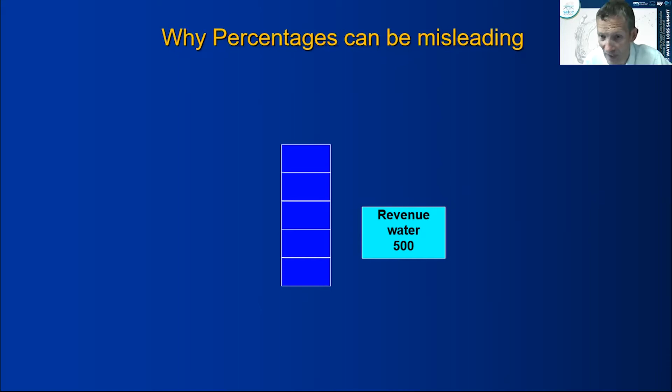We managed to get the consumption, the revenue water, reduced from 800 to 500, because all our teams are working flat out to reduce the consumption. Your losses remain basically the same in this particular case - it's a very rough calculation, but we're assuming pressure management hasn't played a big part in this. So we're keeping the losses, the burst pipes and the meter errors - let's just assume that number stays the same. Your total is now 700, because your non-revenue water has not gone down, since you've driven the demand down.

When you're in a crisis, driving the demand down is the only real thing you can do very quickly. It's very difficult to implement pressure management during an emergency situation, because you need to have the pressure reducing valves in the ground, and it takes you 6 months to a year to put in a pressure reducing installation. Your non-revenue water jumps up to almost 30%.

Because you've been successful, because you've actually driven the demand down, your non-revenue water has increased. It's almost doubled. That is why percentages can be misleading in cases where consumption changes significantly. That is why the IWA often recommend that you don't use percentages and that you use some other indicator. Unfortunately, everybody still uses percentages and they'll be used for the next 100 years. Everyone understands percentages. It is critical that you understand when they can be misleading. Those two slides show you exactly what that means.

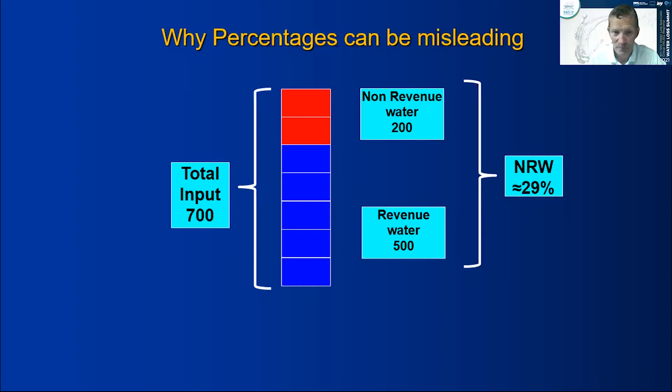I've noticed while we've been during the interval that SAICE has been promoting engineering as a career, with all their adverts about careers, people with screwdrivers and hammers and stuff like that. So I thought I'd just show you a little video clip here. I don't know if any of you know Dilbert - this is a Dilbert clip. If you can keep quiet and turn your volume up so you can hear this. It's not a long video clip. I'm going to play it now.

I'm worried about little Dilbert. He's not like other kids. What do you mean? Yesterday I left him alone for a minute and he disassembled the TV, our clock, and the stereo. That's perfectly normal, kids take things apart. The part that worries me is he used the components to build a ham radio set. Oh dear. Is that bad? Normally I'd want to run an EEG on him, but the machine isn't working. It's worse than I feared. What is it? I'm afraid your son has the knack. The knack? The knack - it's a rare condition characterized by an extreme intuition about all things mechanical and electrical, and utter social ineptitude. Can he lead a normal life? No. He'll be an engineer. No!

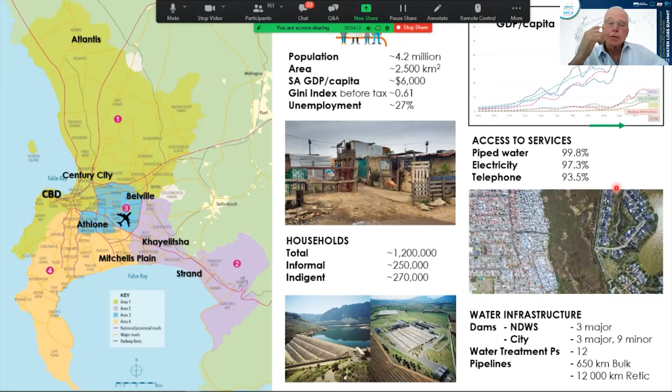It makes a big difference if you only have 10% of the spending power to react. So it was tricky having people make suggestions and then not being able to say thank you very much - that added an interesting aspect. Access to services in Cape Town is pretty good, but a large number of households are informal and indigent. This specifically impacts how water and sanitation services are delivered, because 40% of households do not pay for their services - they're essentially subsidized, which adds a layer of complication.

Ironically, the reason Cape Town was established in the first place was water. The seagoing merchants on their way to the east needed to secure a supply point. And the city's formal record of

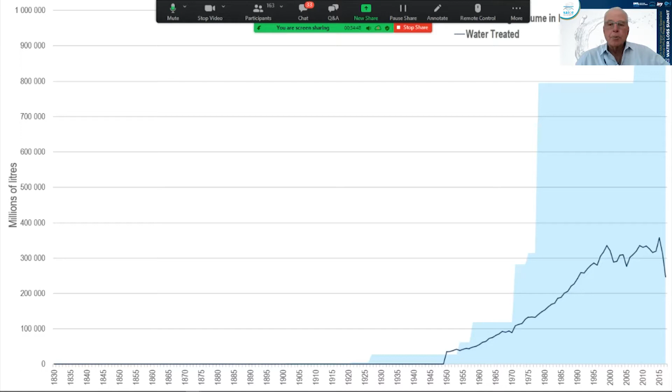water history dates back to some 1834. I've listed a few of the iconic features going forward through from that time. The first formal structures were built from about 1850, and some of those are still in use, where Cape Town has been storing surface water for use.

The graph shows the total accumulated storage in the blue shaded area, with the water treated per day, the annualized, on the dark blue line through the years.

So the first dams that were situated on top of Table Mountain really were very small by comparison with the scale of things today. Then Cape Town expanded further out to the Steenbras, to the mountains above Gordons Bay, and then built Wemmershoek.

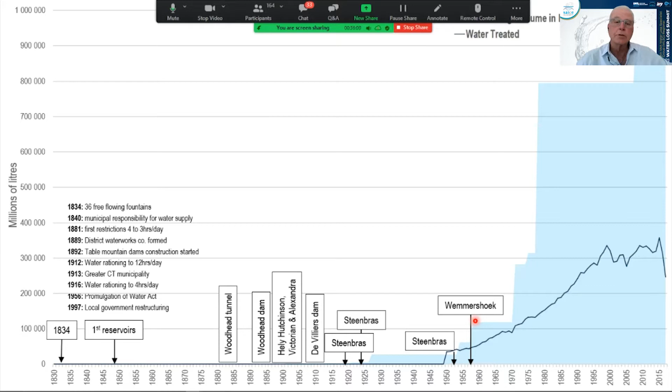It was during the time of the construction of Wemmershoek that the National Water Act changed and made it the responsibility of the National Department to license large dams, and they took it upon themselves to establish a construction unit and effectively constructed the dams thereafter, which were then the Voelvlei, the Theewaterskloof, which really doubled the capacity of the system at that time, and then the last one being the Berg River

Dam, which was filled for the first time in 2007.

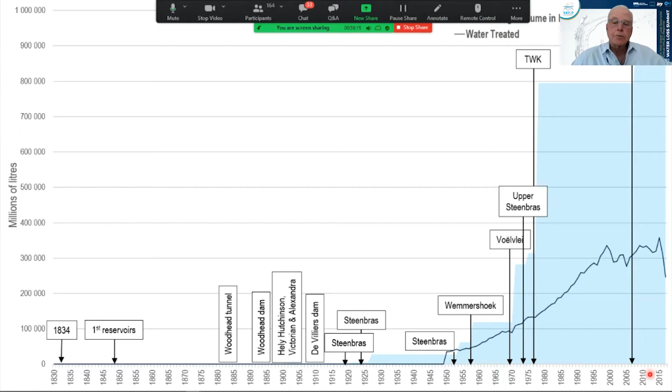Looking at the way the system works, it's important to note that Cape Town uses an integrated surface water system for its supply, known as the Western Cape Water Supply System.

This comprises 6 dams, and as I've mentioned, the last 3 that were constructed, the National Department owns and operates: the Voelvlei, Theewaterskloof, and the Berg River Dam. They comprise the bulk of the capacity.

The city owns and operates the 3 smaller ones, which are Steenbras Lower and Upper, and Wemmershoek, and they account for about 15% of the capacity of the system.

The system is integrated through means of tunnels, canals, and pipeline links, and the yield is maximized by operating the system in order to minimize spillage during the winter rainfall season.

The city manages this by changing the loading on the different dams through its water treatment plants, because it can feed into its own ring main, effectively, of bulk distribution pipeline.

So it's clearly important for there to be close collaboration between the city and the National Department in terms of operating and running the system. Now the majority of the water, as you see, comes from runoff.

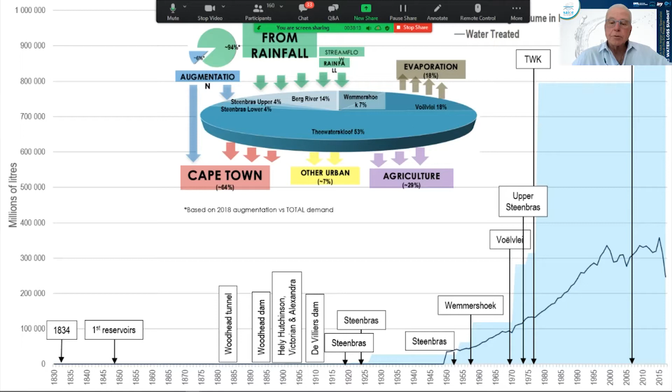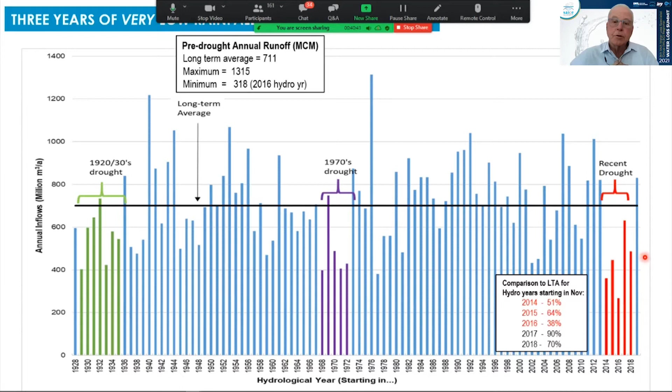But it's interesting to note that the very next year, we were down again with a fairly low level of about 70% of long-term average. We were concerned that might just have been a spike, and we were on a new low. But it would appear things are normalizing again, and certainly the dams are full right now, in fact over 100%.

To look at the fundamental mechanism of the drought, there was a persistent high-pressure cell that became resident out over the west coast of the southern African continent, and this would persist for the period of the drought. Normally, cold fronts would sweep across and cross over the mountainous areas which held our catchments and drop the rain. But with this high pressure cell, it was forcing these cold fronts to miss the continent. When we did get any coming, it would just be the tail ends, very low amounts of rain would fall. The majority would then just fall uselessly into the ocean.

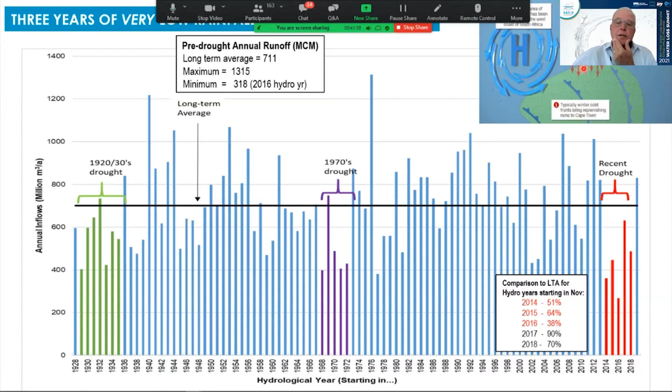So the scene was pretty much set, and we felt like we were operating pretty much in the perfect storm. The water levels in the dams were dropping rapidly. The media, there was a heightening awareness and concern. Social media was growing exponentially with negativity and fake news.

The politics was a bit of a mess, to say the least. The political environment was very tricky, both at an inter-tier level with the three tiers of government, because of different parties being in the central government and the leadership of the country. The provincial party was the DA, and so was Cape Town. But even within Cape Town, there were factions developing, and there was unhappiness there. So that really didn't make things easy for us as officials to manage within the political framework.

Revenue, of course, we needed to keep the business going, but revenue was dropping because sales were down as a result of restrictions. Although we had three levels of tariffs that we could impose at different restriction levels, once we went beyond those, we didn't have any more. So we couldn't balance - that became a challenge as well.

And of course, trust was getting down to an all-time low between the city and the public, and the city and the national department, etc. So we had to find our way through the storm.

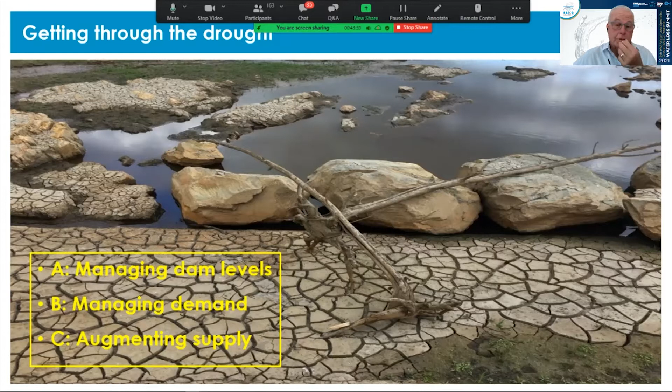So let me have a look at managing the dams. We've seen how the system yield is utilized, and I'll go into a bit more detail: agriculture uses 29%, and as I've said before, that's controlled by the National Department and how they allocate that. Other municipalities in the region, which get water directly and through the city, take about 7%. And the city uses 64%.

As you can see from the split, residential usage is the highest at 70%, with commerce and industry accounting for another 17%, and the balance going to government and other departmental uses.

So the focus was obviously on residential use to drive the demand down, and that's where we put a lot of our attention. Looking at the three graphs along the bottom: this was unrestricted outflows prior to the drought, this was then, during the drought, what was planned to be used in terms of having the different restriction levels, and in the peak of the drought, this is what actually happened. I'll go through them here.

The green is the evaporation portion, which, as I said, was about 18%. But as you can see, in the hot, dry summer, evaporation is high, and it tapers off during the wet, rainy winter periods.

Typically, you get a similar pattern with the urban demand, which is higher during summer and then drops. You can see this band is a bit narrower here during the winter time. Agriculture, on the other hand, in the purple band, takes the bulk of their water during the summer peak period.

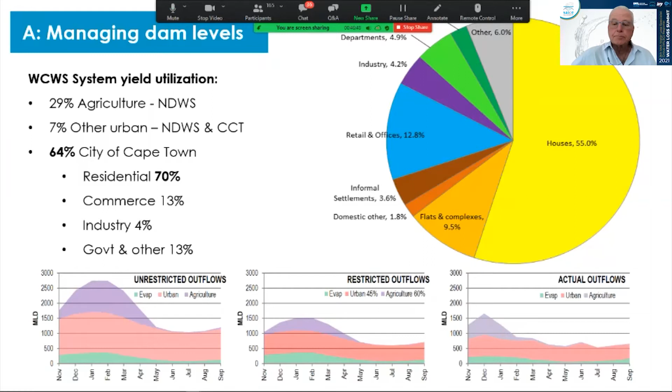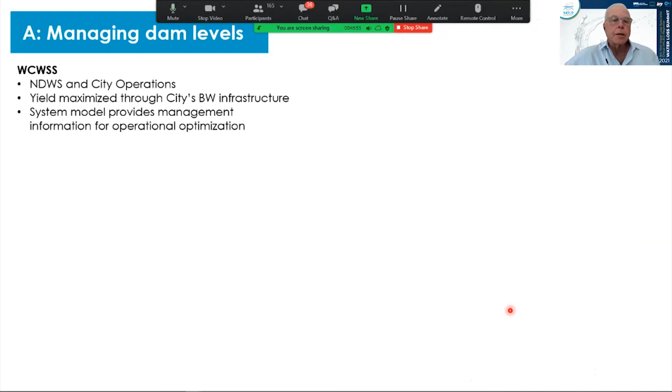So I've spoken about the way in which the national department and the city operations needed collaboration. The yield, I've spoken about how that's been maximized. But what I think I want to get to now is just to talk about how we thought we should best manage this from a public perception point of view.

We realized that we needed to try and get as much information out there as possible. But I must just say at this point that up until a certain point in the process, the mayor had decided that no information could go out of the city about the drought management other than through her or one of her mayoral committee members. This meant that myself, Dr. Kaiser, any of my managers were not entitled to talk to any form of the media and give them any information.

Now, this made it very difficult because the public, you can fool some of the people some of the time, as the old adage goes. But if you keep on trying to pull the wool over people's eyes, just remember that there are retired water engineers, working engineers out there that understand the system and understand how things work, and couldn't understand why certain things were being done. We were being driven in a certain direction through the political leadership, which didn't make sense to us, and we were finding it hard to deal with the public response.

Anyway, to get back to how we then addressed it eventually, we put out a daily dashboard to track performance.

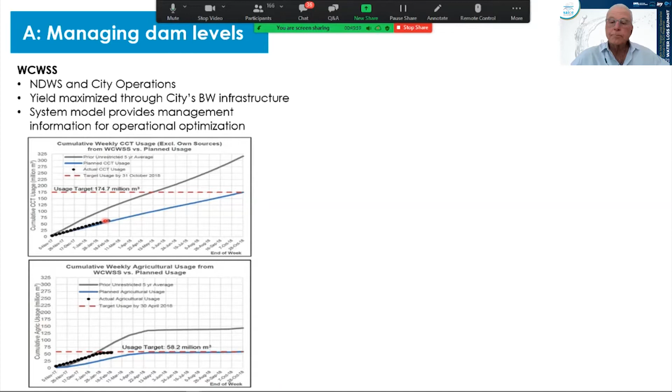The next important thing we did in terms of managing the dams was to monitor and track and effectively show the public how this was doing. This was the time when the Day Zero concept came to life. I need to explain Day Zero, because it was a concept born in the disaster management environment, but it really caught on in the media. We realized we weren't going to be able to kill that, so we needed to take it and use it, but define it in our own terms.

So we used the modeled system curves and superimposed the actual drawdown each week onto that. Let me give you some idea of what this means. You can see there's a line here that says 13.5% - this is the dam capacity of the system, and this is time along the bottom. This is the modeled performance of the dams based on sort of average through the year, and this is the plotted decline of the dam in that particular cycle. This is the 10% level.

Now, beyond that, abstracting water below that is very tricky. We realized we could probably still get water out of the system down to about 8, possibly 7%, with some effort, but typically down to 10% with ease.

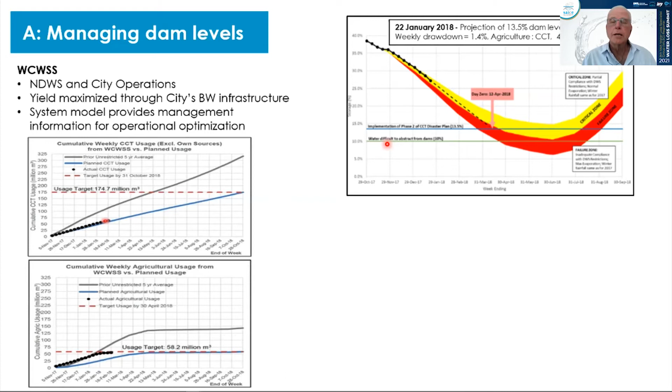So in terms of the Day Zero definition, we said that although in the public eye Day Zero was deemed to be the day Cape Town ran dry, we're saying no, it's the day we will resort to extreme restriction measures if we have to. If we reach that day and the dams are not lifting, we would then shut down the reticulation into the residential areas, and we would set up collection points for residents to collect water from. These were scattered around, and we'd worked out exactly where they could go and how they could be supplied. We would maintain normal supply to key points - hospitals and other key installations - and to commercial areas that needed to keep going in terms of not damaging the economy any more than we needed to.

So how much water would we need to take us through to when we believed we would be in the midst of the winter rainfall season? We gave ourselves a 3-month period from that point of Day Zero. So we worked out that we would need to keep an additional 3.5% in the dams above the 10%. So that 13.5% line was the critical point.

So in projecting the performance curve of how we were going, we would look back up the previous week, what was the angle of the curve, and extrapolate that down. Where it intersected this 13.5% line was effectively the point in time when we considered that to be Day Zero - when we would go to extreme restriction level. So it was a lot more conservative than people would imagine. But this is quite a tricky concept for the layperson to understand, so generally it was just said: Day Zero, Cape Town goes without water.

On that day, on the 22nd of January 2018, a press conference was held, and Patricia de Lille decided at that point she would put this out to the public. So it was announced that we would reach Day Zero on the 12th of April, and that was the date indicated here. That went around the world faster than I don't know what - before you knew it, Cape Town was going to be the first major city to run out of water. So that had quite significant impacts, and it didn't exactly help our stress level.

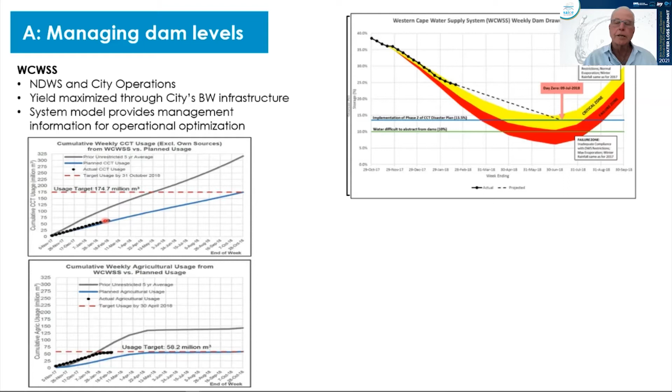And then the third thing was a breakthrough in terms of the response from the public, from the consumers in the residential areas and in industry, to really take on a citizenry approach and work together to try and drive down demand. We broke through a 600, 650 barrier that we'd had and started to get down closer to the 500 megaliter a day.

So with the combination of those three things, that curve flattened out. In the subsequent weeks, this curve flattened considerably, and day zero became a non-issue because it was being projected out to infinity. So for that year, day zero was not a problem. We realized it could occur in the following year, so we weren't out of the woods entirely. This graph was a plot we continued showing, and still do today, of performance against average rainfall and average conditions to show where we are. We set these bands at different levels so each would have a set of operating rules immediately implemented to deal with the condition, so we wouldn't be caught out without having planned what needed to be done.

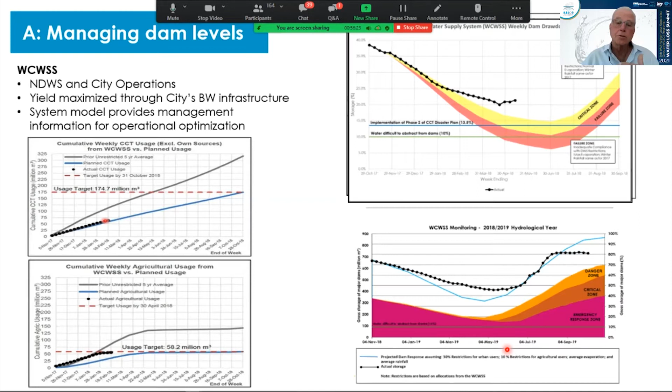So the second aspect we looked at in managing this was demand. This is very important, and I think the focus should always be on demand as a short-term reaction in any drought. We needed to look at communication, restrictions and tariffs, water flow restriction, and pressure management. So these were our key areas of focus.

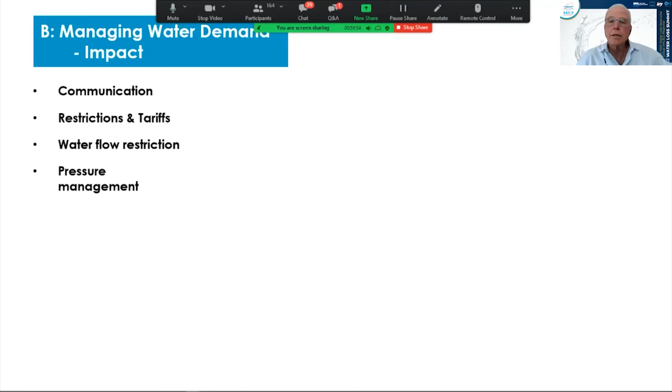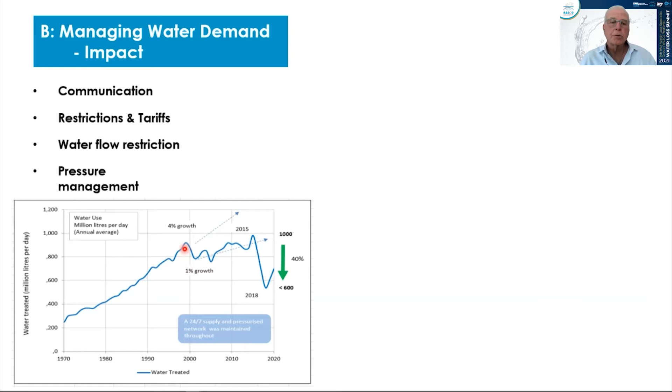This graph shows the exponential growth over the last century, leading up to when we realized that running at 4% per annum was not a sustainable increase year on year in water demand. We needed to do something, and as Ronnie mentioned, we were one of the first to start moving on it. I remember sitting in bulk water, and we established a small water demand management unit in the bulk water sector back in 1999, 2000, and got moving with some small interventions just to get the ball rolling. Then in the following year, the city was restructured as part of the municipal restructuring era, and the water and sanitation department as it is now was born. Into that department, it was decided to have an additional branch, the water demand management branch. That's where the focus was put for the strategy that was developed, and then managing the implementation of that strategy through the ensuing years.

By doing that, we were able to turn around this steep curve that was growing exponentially and flatten it. We did have the help of a drought at the beginning of the century, which gave us the means to implement fairly stringent rules, many of which stayed as our water savings regulations. But effectively, Cape Town didn't draw beyond what it did in 2000 until 2015.

In 2015 was just at the start of the drought cycle that we went through. We had an exceedingly dry and long summer in 2014-15, and the winter of 2015 was very poor. That was when we started to recognize that we could very well be into a cycle of poor rainfall.

That is really critical, because after having had this period with flattened demand, all the reconciliation strategy projections then kept getting shifted with time. The projected times for bringing in new water projects got pushed forward each year, because it didn't seem necessary then to introduce large billion-rand projects when there wasn't really an urgent need for them. I'll talk a little more about that later and its impact.

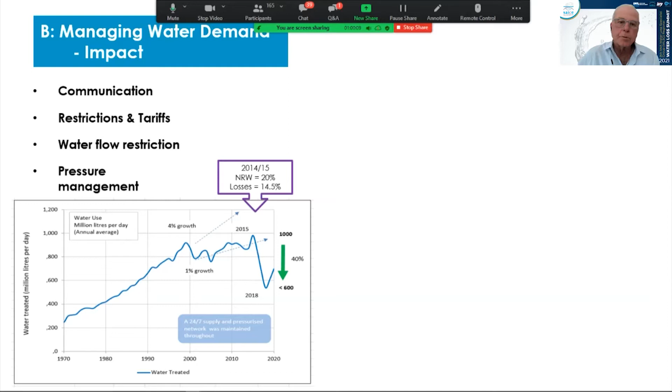Just before the drought started, we had managed to get our non-revenue water down to close to 20%, and the losses just under 15%. This shows the seasonality of demand in the city, with a hot dry summer and a cold wet winter, a typical Mediterranean environment. We saw this pattern, and as we progressed through the drought, the peaks started to reduce until we pretty much flattened it. At the peak during the last year before the drought started, demand was 1,200 megaliters a day, down to ultimately about 550 megaliters a day. That's a considerable drop-off in demand.

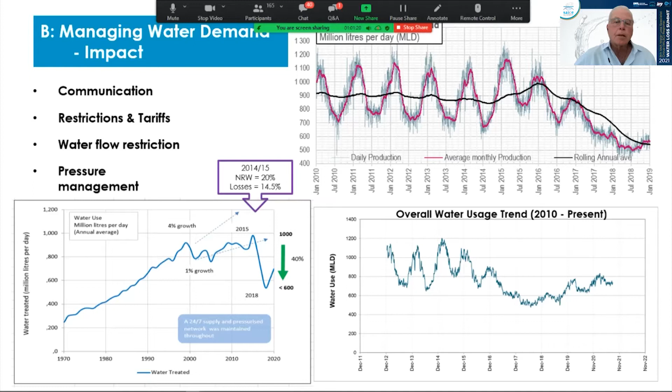This one really shows the pattern as we progressed through the drought, and then how it's recovered gradually since the drought. But you can see we are still well below where we were at this point in time, somewhere around an average of about 700, 720 megaliters a day. We anticipated it would take about 3 years to recover back to normal, but it's actually appearing to take longer.

So communication was really key, and we realized we had to communicate effectively to everybody in the metro, because we certainly couldn't deal with this drought on our own. We needed everybody to play their part.

What were the challenges to communication? It was a large population and very diverse, particularly in terms of their media access. So we needed to be very clever on how we did the communication, because we needed everybody to be part of it. The political environment at the time was very volatile and not particularly supportive of the city, and there were a lot of angry people out there. It was difficult to communicate a very complex water system over which we didn't have full control either, given national department involvement in running the system as well. This made effective messaging very difficult.

So our comms unit had to address it through as many possible platforms. Obviously there was the print press, radio, we had some TV coverage. Media engagement, we had many media sessions where we tried to give as much information through the media as we were allowed to at that time. And then later it became a lot easier once the leadership changed.

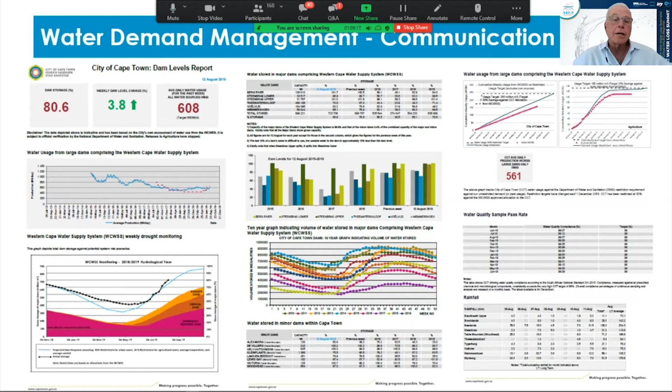As I said, communication was important. So eventually, when we could get out the technical information, we started to publish this communication, and with Dr. Kaiser's help, the publishing of the Water Outlook, which gave a running commentary on a regularly updated basis of the details of the technicalities of what was going on.

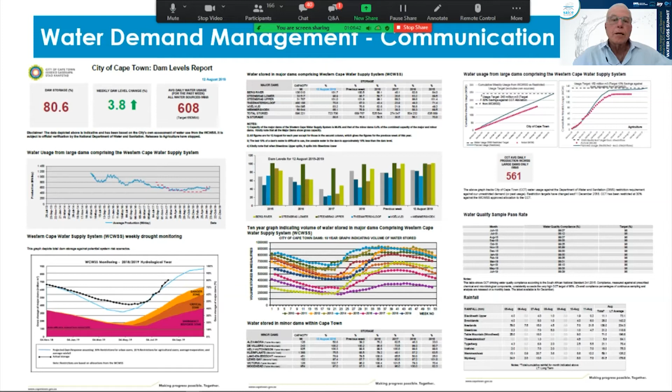Then, fortunately or unfortunately, we had to deal with restrictions in the tariffs. There was fortunately a set of tariffs for each of the restriction levels, and we'd started this back in the previous bad drought at this turn of the century, realizing we needed to set tariff levels and get them approved through council in order to meet the legislation, so that we had approved tariffs to just change to during the financial year. We didn't anticipate the need for 7 levels of restriction, so once we got beyond 3, we had to go to the minister to appeal to be able to invoke a new set of tariffs through that financial year.

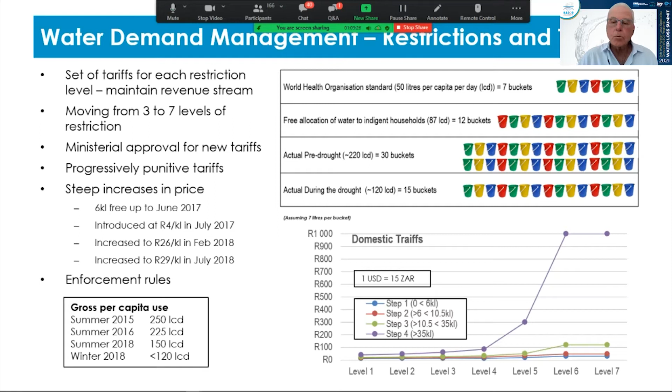And of course, we published when people were exceeding limits. There were obviously consumers who still didn't want to respond, so we would send letters out as soon as people were exceeding the restricted limit. They would get a letter as a water abuser, and once they'd received 2 and hadn't responded...

We would go in and install a flow restricting meter, which would then limit them to 10.5 kiloliters per month, or at a certain stage, once the restrictions got even more stringent, 6 kiloliters per month.

Initially, the target for installing these was about 2,000 a week, but we realized there were a large number of abusers, so we needed to step that up. We eventually installed, over the ensuing weeks and a couple of months, about 60,000 of these water management devices.

Of course, the notifications and complaints started to ramp up because people wouldn't pay attention to the details when these things were installed. They were advised how these devices worked and what they would do, but they didn't realize there was a daily limit. So in order to ensure they would get through and only use 10.5 kiloliters in a month, they were rationed to 350 liters per day. Once they hit that, the meter would automatically shut off, the valve would shut, and it wouldn't open again until 4:30 the following morning.

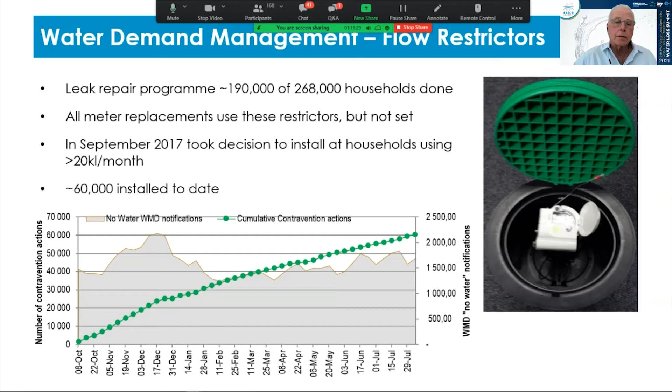So of course we'd get a horde of people phoning to say, 'Oh, my water's off,' meanwhile it was because they'd exceeded the limit. This created an additional workload, but it was worth it in the long run. Just the threat of getting one of these things put in your house was enough to make people change their habit. But it did take a lot of hard work and a lot of sweat and tears.

Now I come to a really important aspect of demand management, and this is the pressure management side. We heard from Ivy yesterday a lot about the city's pressure management program. This did start back way before the drought ensued.

It's important to note that Cape Town traditionally has had very high pressure. This is because we have the benefit of our water sources being high, in other words, a lot of potential energy in the water. We've utilized this to drive turbines, to run the electricity for the treatment plants, to use the gravity to drop the water down into our bulk service reservoirs, scattered around the city at 110 meters above sea level. Having our base storage at that level gives us the provision to supply pretty high pressure all the way down to the coastline.

In the past that seemed a good thing, but in the days of demand management, we know that high pressure equates to high loss rate, a leakage rate. So we were progressively expanding pressure management, but when we realized this was a real opportunity to drive out additional savings, we approached the companies we'd been dealing with as contractors for installation of systems and asked them to come forward with a proposal to really extract a large amount within a short space of time. Over a couple of months we developed this pressure management to really expand the zones being controlled. This then realized an additional 70 megaliters a day, as Ivy mentioned yesterday, with almost half of our reticulation system then being under a pressure managed system.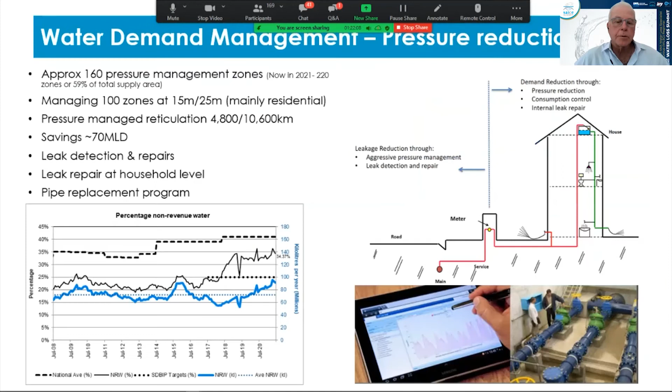Desalination was the other area that Cape Town was tasked to investigate, and an in-depth feasibility study was conducted, completed in 2015. Coming out of that, the estimated costs were multiple billions of rand capital, with about R1 billion a year operating expense. This did not excite the city fathers in terms of funding, because there were many competing urgent needs, and given that it didn't appear to be such an urgent need, we didn't really get the green light to take it any further. So we kept it in as a long-term strategy to be used at some point in time.

So at the time of the drought, there was much political pressure to look at desalination.

If I can just quickly go back, there was a period in 2017 when the mayor, still in political leadership on the water drought issue, asked me in one of the daily meetings with her what would be the minimum level of demand the city could have without having an extreme effect on people's survival and existence, and the economic performance. So we did a couple of quick back-of-the-cigarette-box calcs, and I came up with a number of 500 megaliters a day.

She said, okay Peter, I want you to build us 500 megaliters a day of alternative water source like desalination, and then we won't need to be dependent on the National Water Department's dams. At that time she'd been having a bit of a spat with the national minister, and she wanted to become independent from the department's dams. I said, Madam Mayor, I cannot do that. It's not physically possible to build 500 megaliters of alternative water supply in the space of time for it to have any effect on us dealing with this drought.

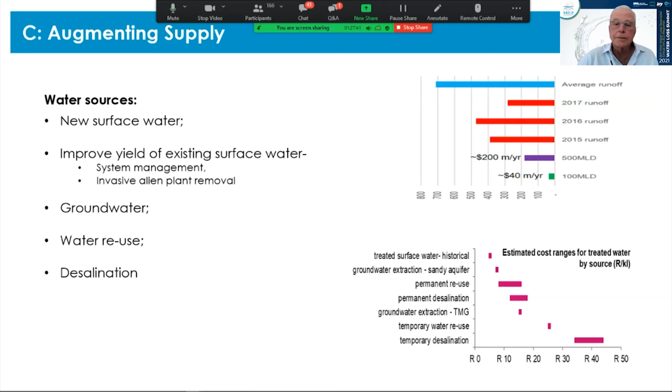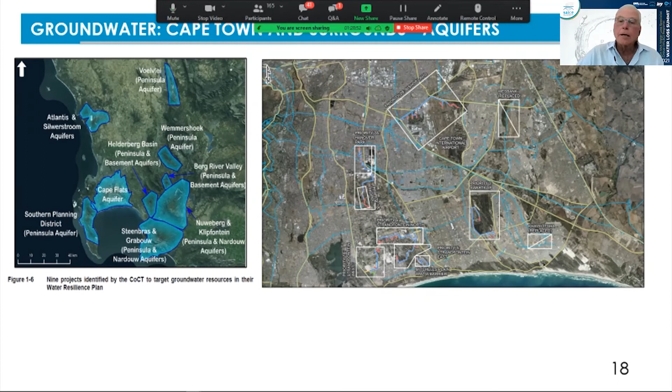Sorry, I'm having a problem with my mouse here for some reason. Can't seem to get it out of... Oh, there we go.

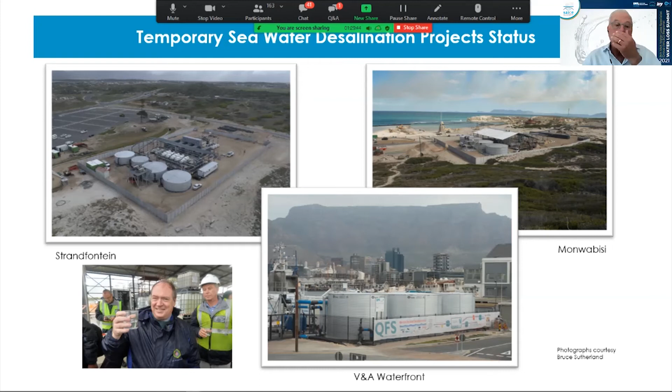At the start, I asked them to put out a poll, and I don't know if it's possible to have that poll put up, and the results. I'd asked for this to be put up at the start of my talk, so I'm not sure if anybody has yet answered, but if we can see the results of the poll, that would be great. If it hasn't been put up early, if you could just give your indication as to what your view is on that question, and I'll talk about it in the meantime and then give my view.

We were highly criticized for the severe restriction level that we were imposing, with typical comments like bad planning coming out. What lay people and particularly politicians don't seem to realize is that implementing restrictions doesn't equate to the water supply system failing. Restrictions are a very important component of managing a water supply system. Unfortunately, typically, in drought situations, there's a reluctance to impose restrictions because there's a view that it shows weakness or failure, and that is really not the case.

So I just thought I would cover that at the end of the discussion on the drought. Now, what I'd like to do now is show you a little video that we produced once we had got into fairly good response from the public, from the consumers. This just really was a thank you in a way, but also just promoting further good practice. So I'll play the video now.

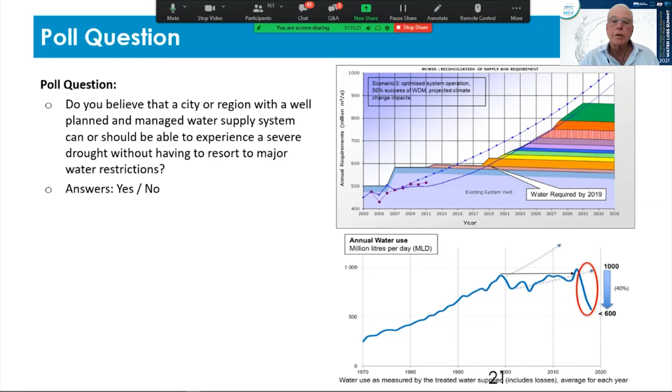Sorry, that was also just showing the storage record, how it moved after the drought, and how we've filled, and currently we're at about 102% on the system.

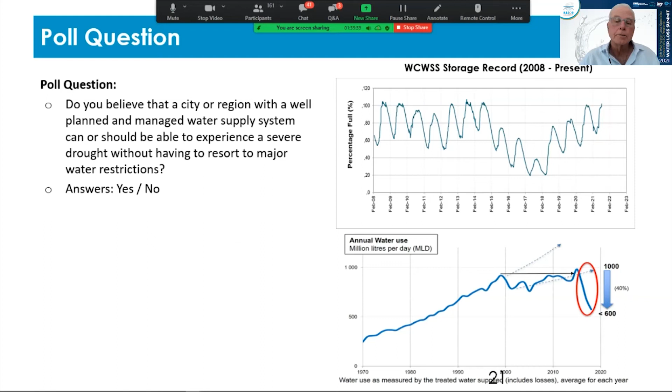All right. Hey, South Africa. This is a message from Cape Town's bucket-bearing bodybuilders, the late-night leak reporters and repairers, the water-saving succulent specialists, our pressure management magicians, the water-wise schoolyard vigilantes, and the Cape's compulsive consumption calculators. It was tough, but together, we refused to waste water. Now we're the number 1 water-saving city in the world. Come and see for yourself. It might just change the way you think about water. The City of Cape Town, making progress possible, together.

All right, well, that really covers how I want to deal with the drought, apart from a couple of slides at the end where I will cover the lessons learned. I'm not sure that there's a lot of time now left. Ronnie, you can give me an idea, because I don't think I'll go through the strategy in detail. I think you've got about 5 minutes, Peter.

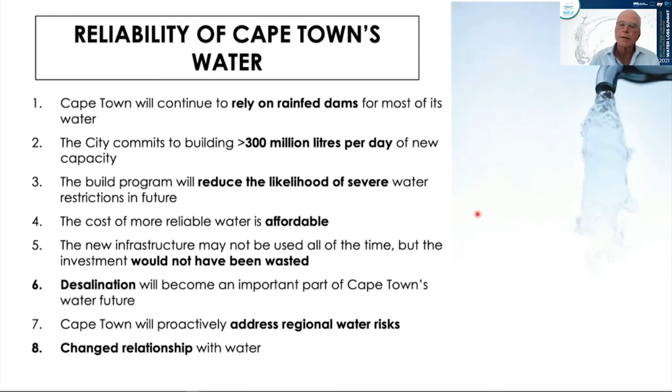During the drought, there wasn't a day where it wasn't a family discussion or dinner party discussion or whatever, when we still had dinner parties, prior to COVID of course.

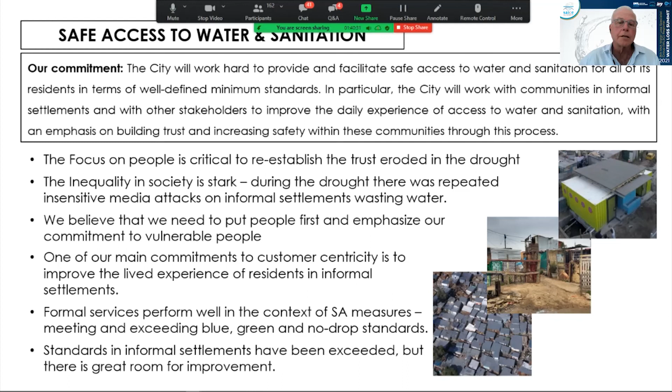So now these are the five commitments, and I won't go into details because you will have access to a copy of this presentation, so you would be able to look at the details. Needless to say, there's a lot of thought that has gone into this.

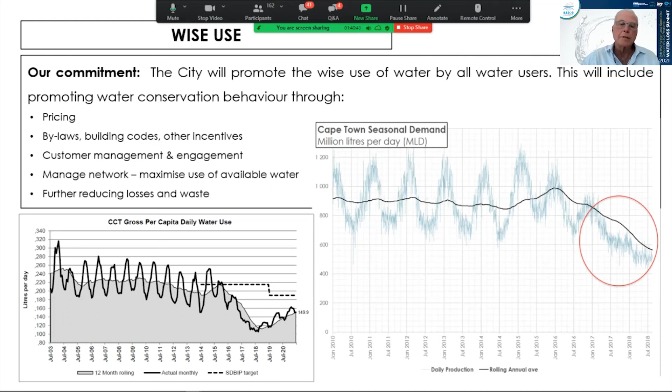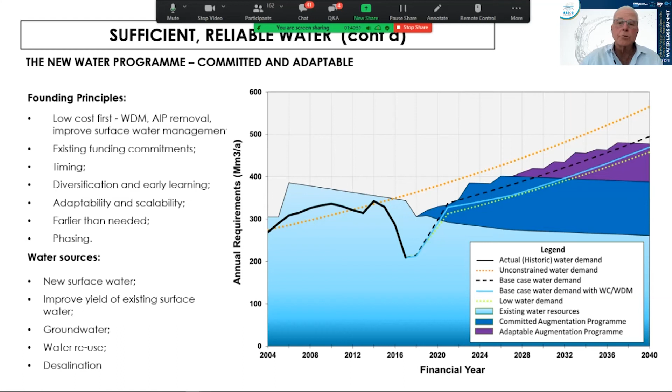Strategy, and it has a very effective means of preparing us better for an extreme event of this nature in the future. So I'd invite you to have a look at it if you get the opportunity and if you feel you would like to learn from it.

So those are the last of which was to work Cape Town towards becoming a water sensitive city, which I am very passionate about and believe is really very important.

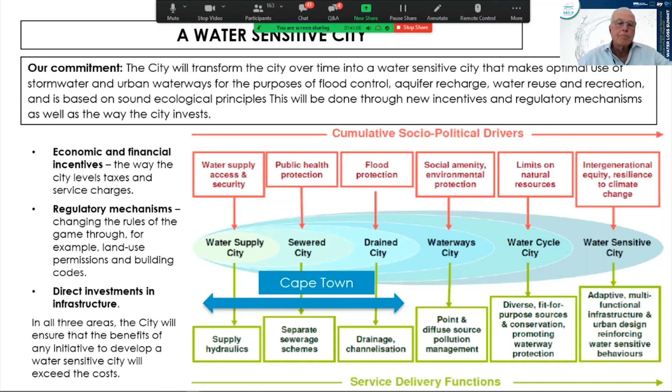I wanted to just touch on the lessons that came out of this. Prepare for droughts. Cape Town is vulnerable to climate change related risks, and we realize that. So let's prepare for droughts, let's not wait till they occur.

We've put action plans in place to be triggered at particular points as they occur, so that there is a set process to follow.

Regional risks, resource risks need to be better managed. Agreed operating rules must be adhered to, and clearly they weren't during the drought. There were some transfers that should have taken place. There were a lot of problems on the national department side and on our side in some instances too.

Necessary releases must be done timeously, otherwise you waste the water and it runs away to the sea. Better catchment management, including seriously addressing alien vegetation removal - I'm pleased to say that has started moving very much in the right direction - and nurturing better cooperation between the tiers of government.

We need to build ahead of time on diversifying resources. Risk can be further reduced through diversification, less dependent on rainfall. That is the plan, to move away from being virtually 100% dependent on rainfall. Over the next 20 years or so, we should achieve a reasonable level of diversity.

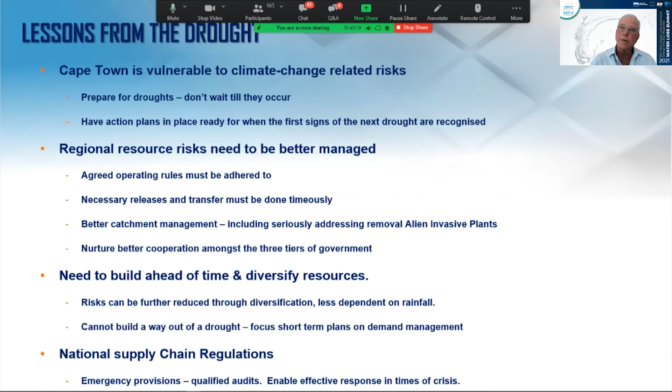And then we were hit with audits afterwards. The Auditor General came down on us like a ton of bricks, obviously seeing a weakness and an opportunity there. I think some leeway must be given during these times of emergency, because clearly mistakes do get made.

Responsive, effective, and consistent communication strategy, both internally, which is very important, and obviously externally. Raising awareness, partnering, promoting citizenry - that is the key, getting everybody working together and aligned - and then dealing with fake news. We've heard a lot about fake news all over the world.

Sustain water conservation and demand management practices in the department, and support household resilience development. That is very important too, where people are wanting to go as far as they can off the grid for, let's say, discretionary use of water. Let's support that, let's give them the opportunity.

So we looked at the bylaws, we looked at guidance documents for people using grey water etc., and that did help a lot.

Then accurate metering - to measure is to know, the old adage, what gets measured gets managed, very important. It's important that we have clear understanding and accounting within our water system to be able to manage effectively, and this leads to improvement in non-revenue water and results in better revenue management, ultimately revenue increases.